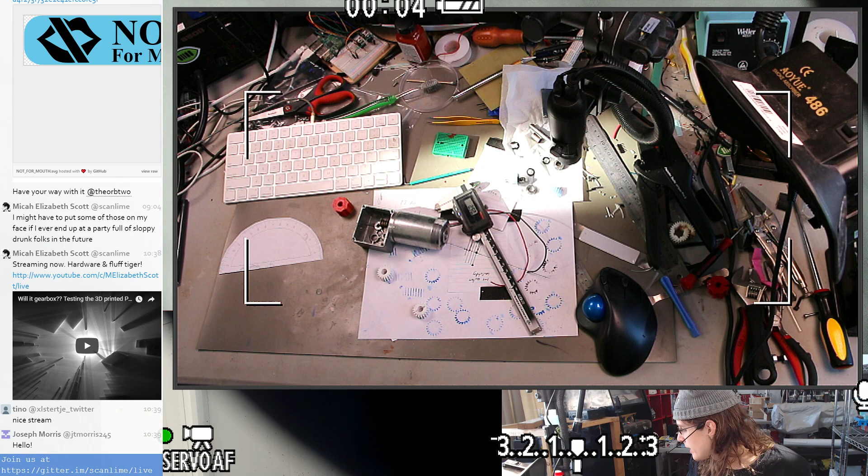And then I think I made the situation a lot worse by opening this motor and then adding some different lubricant that might have been bad for this plastic. And the only reason I did that in the first place is I was trying to diagnose some different problems I was having where the motor worked, but it was a little bit wobbly.

Because this was the motor I was using for some earlier tests on the very first spool design, where I was mounting the spool directly to the motor. It didn't work very well, and it also exacerbated the problem with this motor not being especially straight.

Yeah, it turns out that after taking these motors apart, the bearings on this motor just would not be able to support the spool on its own. It has a bushing on one side and a tiny bearing on the other side. So this motor, I'm not gonna trust the gearbox to support much more than just the output gear.

So speaking of the output gear, we had to destructively disassemble it to take this whole thing apart, which was the plan. This is not the first or the second, or maybe even the third time I've had to take one of these gears off because of all the earlier development and testing. But this is just how this is designed to work. I had tried other strategies.

Some of the other wheels that I use in this design have set screws, but in my experience, I couldn't get a set screw based design to be very strong and very concentric. I also didn't really have room to leave any kind of hole in the gear surface, and I didn't have room to leave a shoulder up here that would support the set screw really. So a lot of factors coming together meant that the best design I could come up with for this gear was something that you hammer on and then cut to take off.

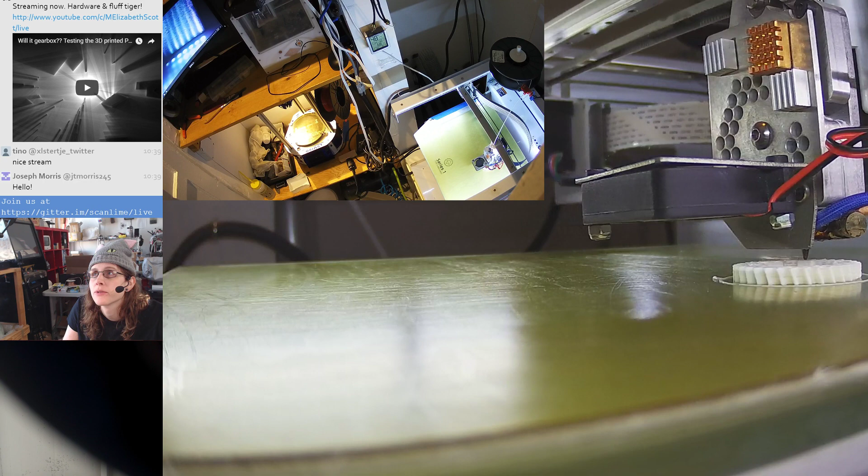So I printed a replacement hub for that, and the flexible part is printing here, and oh man, these cameras apparently are not very reliable right now. I'll have to restart this one. There we go. So yeah, there's the NinjaFlex exterior printing. So that's happening. On the last stream, the plan was to 3D print a replacement for the broken gear. So I'll show you how that goes on in a sec.

I think I actually need to put some gloves on, because, you know what time it is? I think it is Shmoo time. Here's a glove. Oh, there's the others. I didn't even have to get up for that. I'm already getting some of that silicone lube on my fingers just from handling that broken gear.

Oh, interesting. Station 240 is wondering if anybody else is getting a bunch of 500 internal server errors from YouTube. Yeah, I don't know. A lot of the YouTube errors that people seem to periodically have are probably geographical. So maybe people on certain edge servers are having problems and others are not.

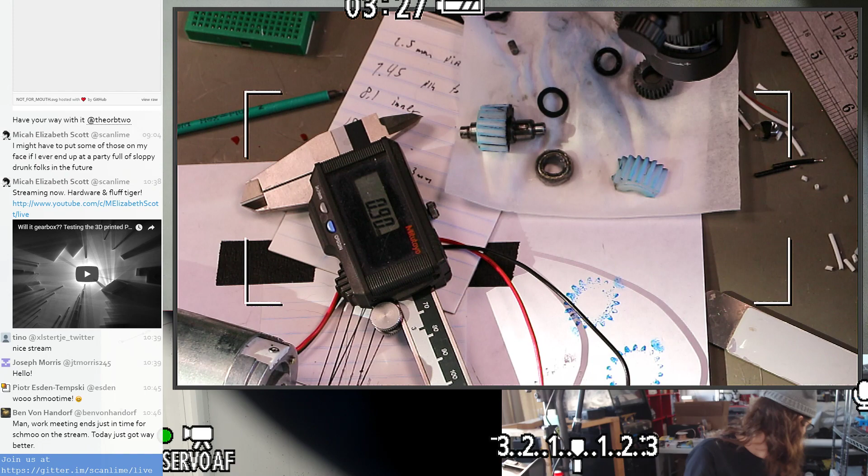I'm actually going to chuck out this broken gear. I don't think we need this anymore, and it's just a lubey, melty mess right now. Just wanted to get maybe another photo of it before I throw it away. So yeah, that's a perfectly good gear that I had to cut to open the broken gearbox. Not a big loss, since it's basically just an hour or two of 3D printing.

Oh, nice. Ben got here out of a work meeting just in time for the Shmoo. Awesome. We also got some random sunlight coming in here. There's not a lot I can do about this particular sunbeam right now, but it'll be gone in probably 10 minutes, so let's just deal with that.

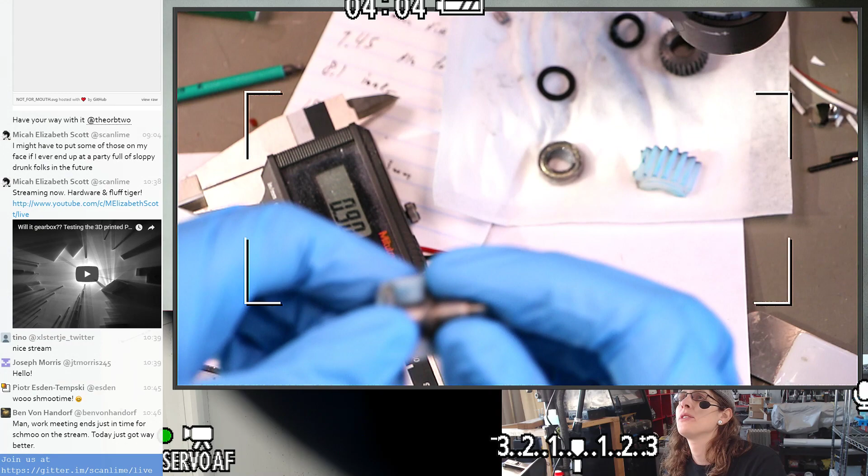Let's actually get a closer view of the original gear. So this is actually new Shmoo. One of the tedious things that we did on the last stream was to fully clean and degrease the old parts, and then reapply grease that is definitely safe for plastics. So I had a mixture of probably lithium grease and some kind of thick oil that it came with. Let's go to manual focus. And so I cleaned all that out and replaced it with silicone Teflon lubricant, which should be fine for the metal pieces and should be great for the plastic.

So yeah, the way this goes together, this is a shaft that was turned on a lathe to get these different indentations and features. There is a hole drilled here and a pin hammered in. The pin looks like it was hammered in with the gear in place. There's a pocket milled where a key fits in there, which is this thing. And that's about it for the axle.

The side with the key holds this other gear, which just holds that nicely against that shoulder. Already some nice Shmoo coming out. And then the original plastic gear fit either like that or like this. Like that. Fits right up against that shoulder. So there's a small gap of maybe 1 millimeter between the two gears, and then a nice surface to fit in. I think both of these sides fit in bushings.

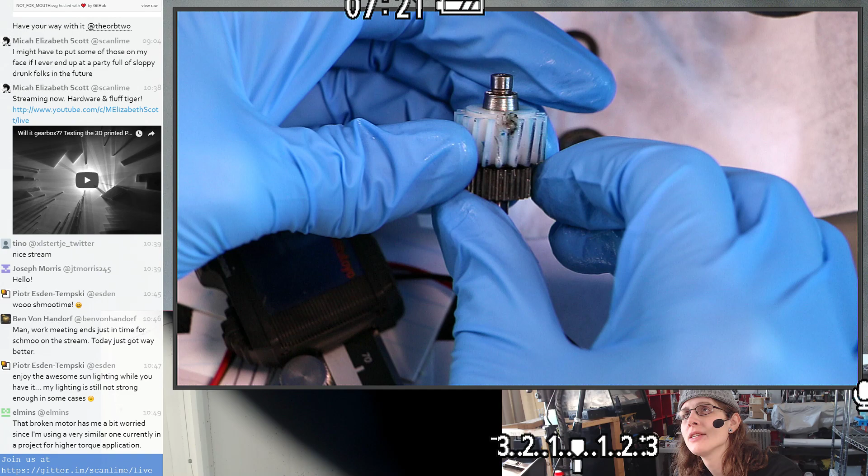So yeah, on the downside, this design seems pretty terrible. On the upside, it might be easy to fix. So my plan: we ditch this gear, keep the whole shaft assembly, and we designed and 3D printed a thing on the last stream that should just slip back over this, and assuming that all fits together, I can use epoxy to form a strong sort of keyway between the pins and the channels that I left in the plastic.

And the one that we printed on the last stream was totally wrong, because I had gotten confused about how this mounted, and I assumed this would fit this way, but of course it doesn't. It fits that way, so the pockets have to be oriented the other direction. And also the inner diameter was just too narrow here. So we already knew on the last stream that this one was no good, so this one's trash also.

Oh well. Oh, and as far as material, most of my printing is PLA, but I wanted to try something high strength for these, so it's printed fairly solid out of PETG. Or no, it's not PETG, it's PET Plus, the MadeSolid stuff. Not quite sure what chemically the plus stands for.

So, if we did this right, and I have not tried this yet, this should fit together like this. And it's a tight fit, which is better than a loose fit. Hopefully it fits at all. I think my printer might have been over extruding a bit for this whole print, which might be bad. Oh, I think it's fitting. It might be time to take this to the vise. It's going to be that hard to get on. I hope it doesn't get stuck on here, because I do need to put epoxy on there.

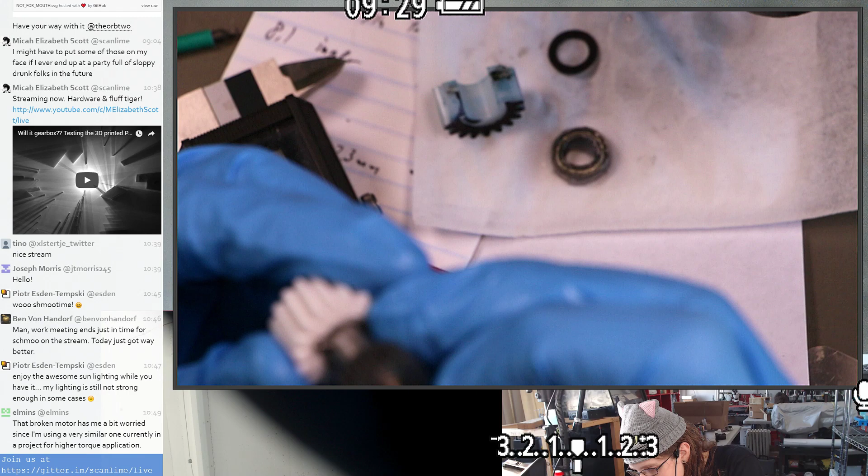Oh gosh. Are these pins not lining up? You know, I just noticed this. The hole the pin is put through is not centered. What? That's off center. I didn't notice that at all. I just assumed it was straight through the center. Well, we might be able to force this together in some capacity. I mean, I left a little bit of clearance, but probably not that much. I'm just gonna see how far I get with the vise. I don't know why that would be off center. That's really strange.

Extrusion multiplier. I don't know. Does Cura even use that terminology? All the slicers have different terminology. I was going to touch the gear. I didn't get that much lube on the gear. I think we're mushing that together. Yeah.

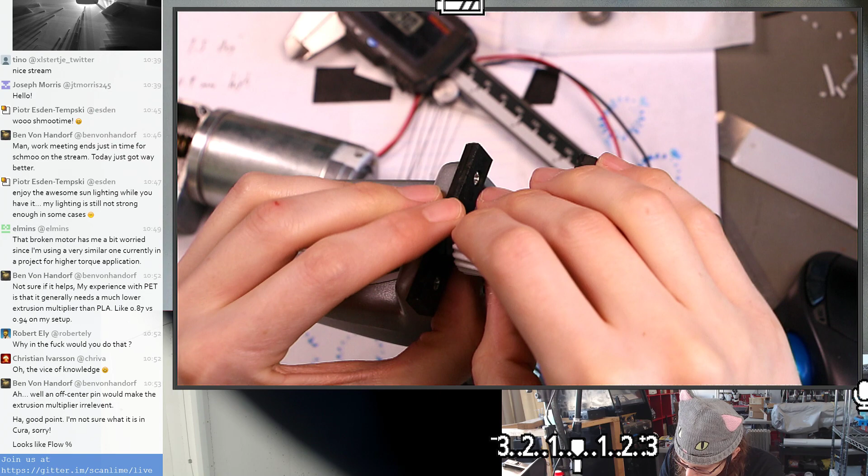Flow percentage. I mean, I thought the whole point of flow percentage was, okay, something is already wrong elsewhere in your calculations, you're just going to bodge it at the very last moment. So we could do it that way, but there's probably another way to do it also.

This is turning out to be a tight fit. We might be able to test this without even putting epoxy in. Ooh, I think I'm getting the nut stuck on there now. Uh-oh. I might need a larger nut. Yeah, I need something larger. Let me look for a different bit of hardware for that. That was an M8 nut. It's a little small for this. I don't have a lot of really large hardware here. Any big washers? Maybe these?

Oh, I think this will work. Yeah. Just keep all them things stacked. Yeah, well, maybe, oh, here we go. Is that better? Yeah. I think we just kind of brute forced our way through the pin misalignment there, but the gear is probably a little bit crooked as a result.

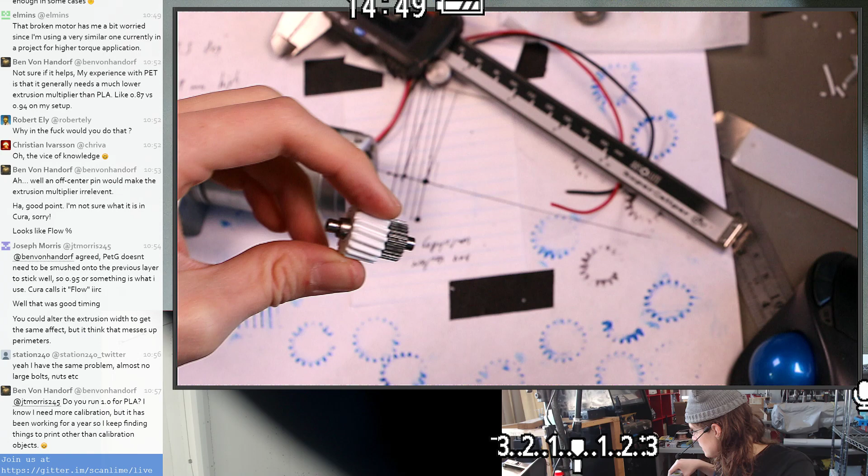Let me see if I can fix the crookedness with the vise. That's not bad. Let's just try that in the gearbox and see if this is even remotely the right size. Because this is all based on some guesses and some bad trigonometry.

Yeah, so actually the problem that was taking so much time last time, I just couldn't find a definitive way to just measure a gear. And so I guess maybe this is just a harder problem than I gave it credit for. There were strategies where if you were designing a gear, you could calculate some measurements, which you could then perform on the gear by putting pins in between the teeth.

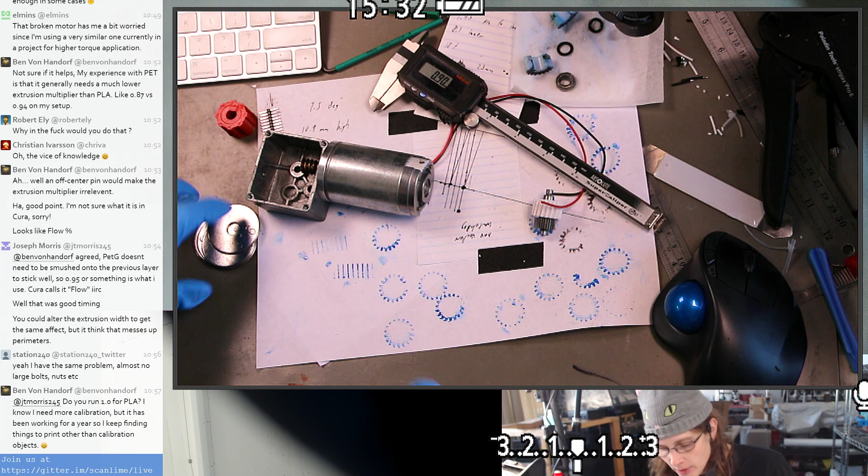But I couldn't find a straightforward way of going backwards from those measurements to possible geometries that the gear might have started out with. And it seemed like that might have actually been a harder problem than I was anticipating too. So we just kind of eyeballed it.

Well, so then I came across the hint that gears a lot of the time use very standard numbers for the module, which is one of the design parameters. And so I looked at some candidates, and this one seemed really close to 1 millimeter, so I just tried using 1 millimeter, and that's what we're doing. There's a little bit of PLA scrap on the edge here. That very first layer did not adhere very well on this print.

Okay. So, let's just see if this works with the worm gear at all. Ooh. That looks really nice, actually. Oh, yeah. Yeah. I say we assemble the gearbox with just minimal extra lubrication and without epoxying the gear in, and then just see how well it runs. And if it runs at all well, then I think we just put some epoxy in and then do some more tests after that cures.

So now I just have to remember how to assemble the gearbox. There's a bearing for the output shaft. There's the output shaft itself, which is a little bit weird. There's a spacer that goes on this side. I'll need to properly lubricate this all when I put it back together again, but yeah, I didn't need to take this clip off at all, really, except to get the old lube off. So that clip can just stay there. It's keeping the gear on, but the gear is also just pressed very tightly, so it's not really going anywhere.

And then there's an O-ring, which kind of cushions between the clip and the sleeve that goes over it. And the sleeve, this is like a spacer. At least I think that's how this whole thing goes. So then that mates with that gear and presses somewhere into the bushing. Yeah, those are mated. Look at all that shmoo. Oh yeah. That is definitely a shmoo o'clock.

Okay, so I'm going to take these gloves off and power up the motor a little. I guess I should put at least a couple of screws in the gearbox. Yeah, let's just put a couple of screws in there, just because I don't want that wandering off and misaligning all the shafts. I know I'm using the wrong kind of screwdriver. Okay. There's shmoo everywhere. Alright. That feels like a worm gear should feel. That's nice.

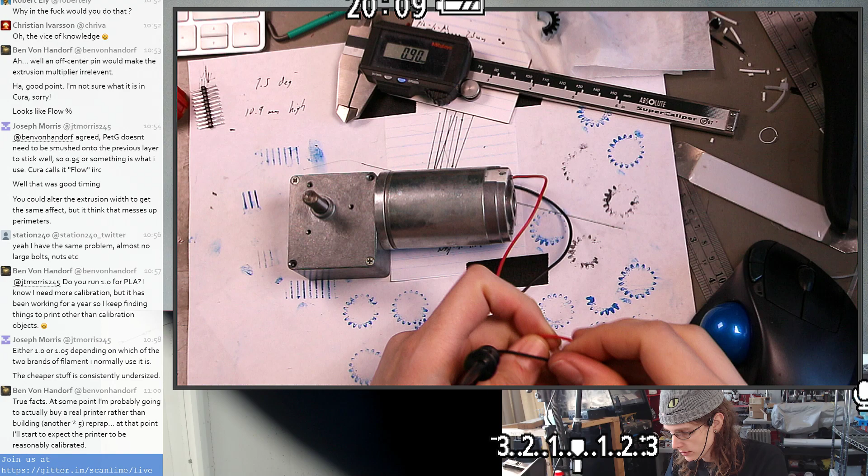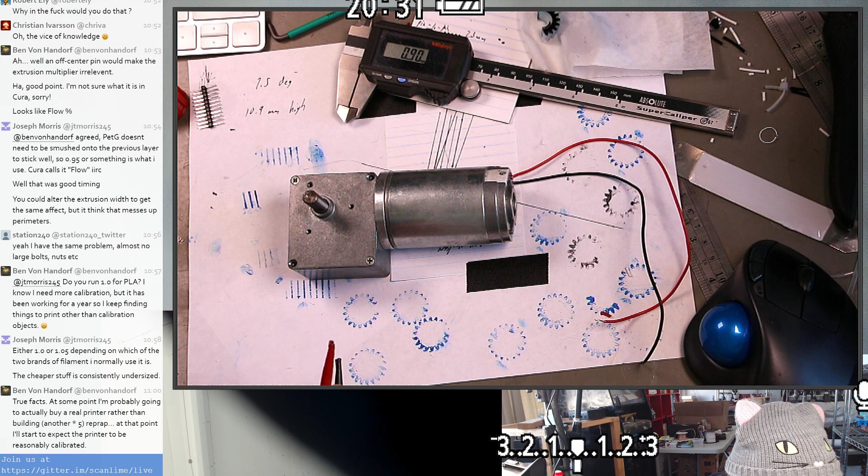Let's get the power supply warmed up. Let's just give it a couple of volts first. That gear was very easy to install, and it might be that the off-centeredness of the shaft is not a big deal, and I can just chalk it up to their sloppy tolerances. I can play that sloppy tolerances game too. Okay, I've just got like 2 volts. I don't even know if the motor will start, but let's try this.

Ooh. It was turning. Oh, I hit current limit. I only had the current limit set to 0.5 amp. Let's bump that up to like an amp or so, 1.5 amps. Okay, it needs a little more voltage.

I think it's actually stalled. I'm gonna give it a little more current, but I think it's stalled. Yeah, that... Oh, no, there it goes. Okay. Hear that? Let's run it at higher speed for a little while and then open it up and see how it looks inside. It also does not have very much lube, so I'm not going to run it much. And it's only got 4 volts, and this is a 24 volt motor.

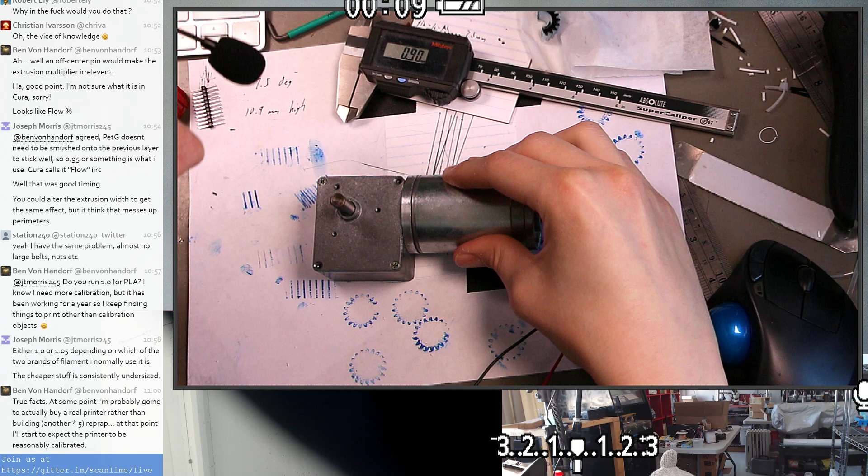Oh, it is knocking. Yeah. Let's see how it looks inside. That would be usable, maybe. We got up to like 20 volts there.

Sorry, I'm a little behind on the chat, everybody. Use the other 3D printed gear. Which one was that? Oh, you mean of the 2 I printed? Yeah, I was making sure I had the 2 straight.

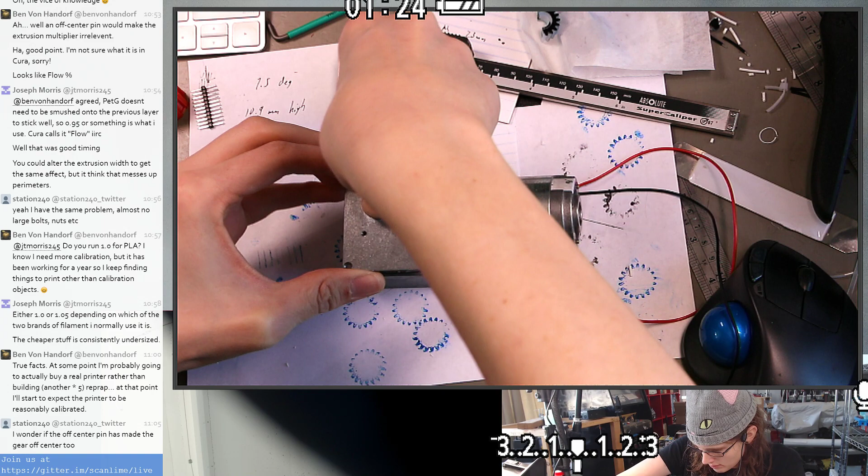Releasing the shmoo again. Is this a re-release of the shmoo rerun? Whoa.

What is going on in there? I mean, there's lube everywhere, which is good. I don't actually know where that really horrible feel was coming from. It could have just been unevenness on some of these teeth that would maybe wear away over time. I don't see anything terrible, though. So... yeah, you know, I might just put some epoxy and some lube in this and then let's close it up and run it for a bit.

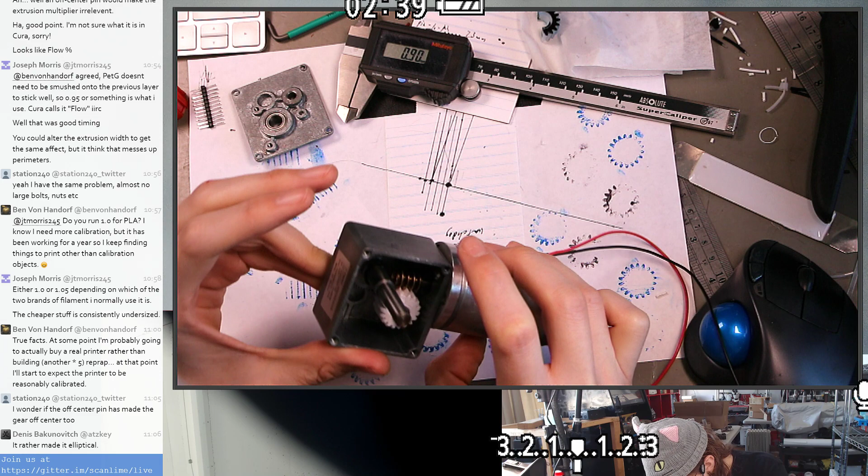I mean, I shouldn't do too much with it until the epoxy cures, but it honestly doesn't seem like I need the epoxy for that much right now, so maybe it's not a big deal. It'd be nice to look at it here, but we can't really run the motor without the top case on. I mean, I could try running it really slowly, but there's a chance it destroys something by being misaligned. Let's just give it a couple of volts. Back to 2 volts at half an amp.

I'm gonna get a better camera angle too, or a better zoom. Oh yeah, that's a good point. station240 says that the off-center pin might have made the gear elliptical and kind of off-center. Yeah, maybe I should reprint this instead of just gluing this one on. I'm schmooing everywhere. It just got pretty jammed. Oh. Yeah, well, that's a good point. I'm gonna put some gloves back on and take this off, and let's look at how circular our gear is at this point.

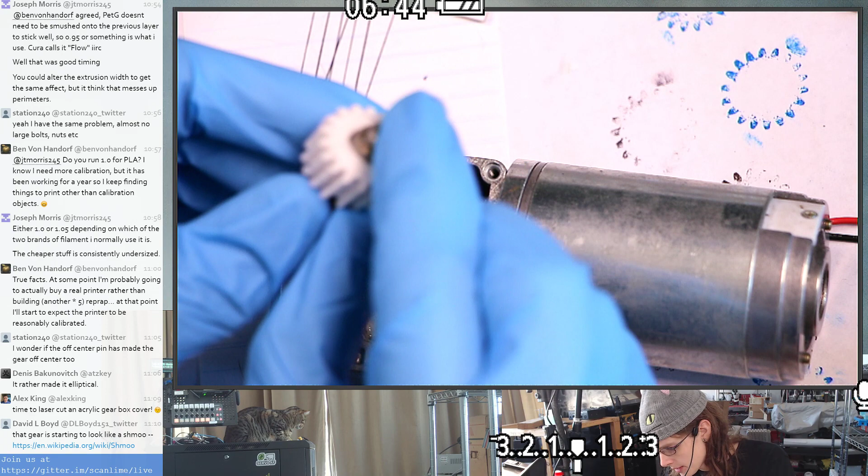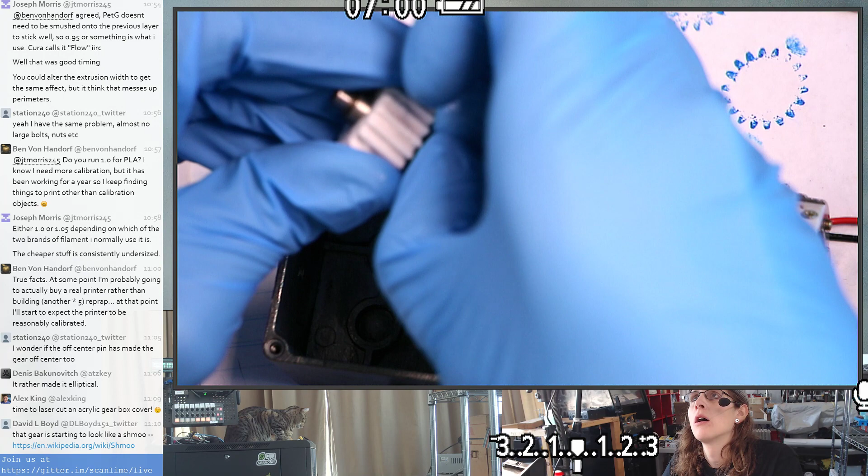So for this, I suspect I'll have to press it out with the vise or cut it off again. Pressing it out with the vise might be easier. Let's find out. This gear just slides off, and let's save the key. And save, not drop. Save, not repeatedly drop. Alright. Well, hammer maybe. I could probably put this on top of my vise and then just hit it with a mallet a few times and get it out. Mallet.

So there's definitely a bulge on this left side of the gear. Like, yeah, it's kind of cinched together the material on that side of the gear, stretching it. It's very strong though. I'm pretty impressed the plastic didn't break during that process.

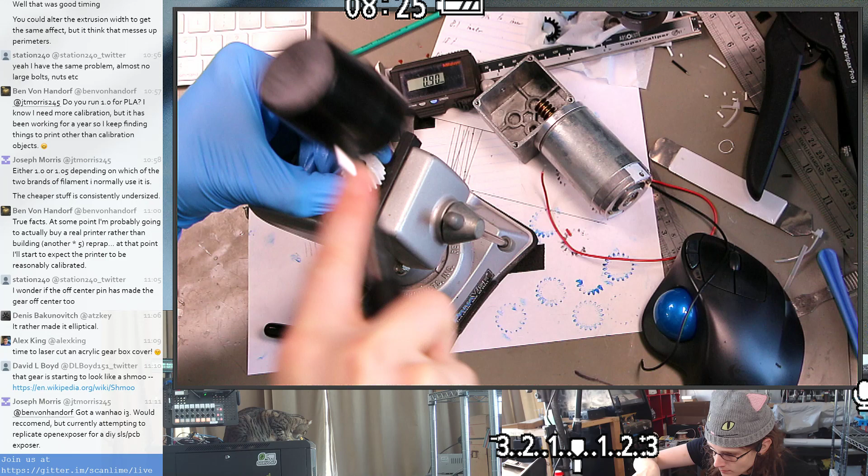Yeah, something I can poke this out with. Oh, this is about the right diameter. Oh, not enough oomph there. There we go. Alright, there's the shaft. Good as new.

And, oh, there's our slightly distorted gear. Okay. How far off was that? We're obviously headed back into CAD, but geez. It looks like it's just entirely to one side of the center line. So if that's the center line in the middle, I think we've got the whole thing down to the bottom.

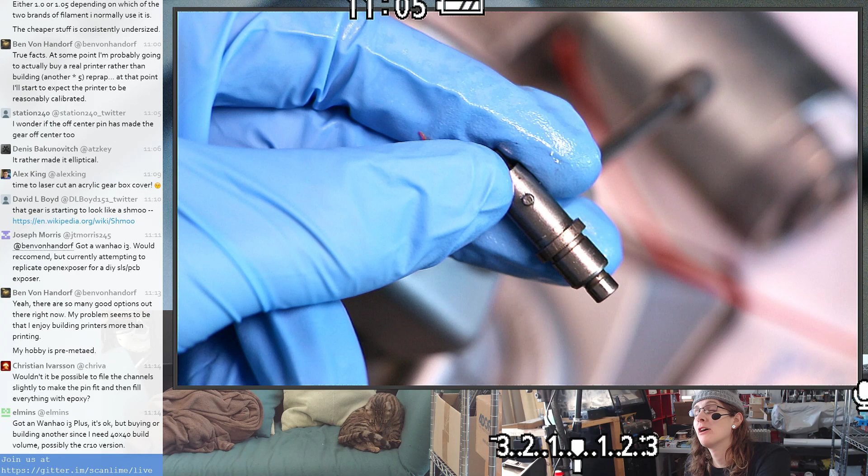So we can also make the channel a little bit wider. I probably will go ahead and put some epoxy in because, well, I guess it's probably worth another test fit. But the thing is, if I have to destructively-ish get the gear off, then I might just go ahead and put epoxy in the first time I put the gear on. And then if it works, I'm done. And if it doesn't work, I just have to also take off the epoxy when I'm taking the gear off. I think that might be where we're at. But if we're going that route anyway, then I can make the channels a bit wider pretty easily. Alright, back to CAD.

Oh yeah, how's the printer doing? Wake up. Still making that gear. Alright. Well, depending on how this goes, this might end up being kind of a short stream where I design a part and then I'll have to get back to you once I've got the next version printed.

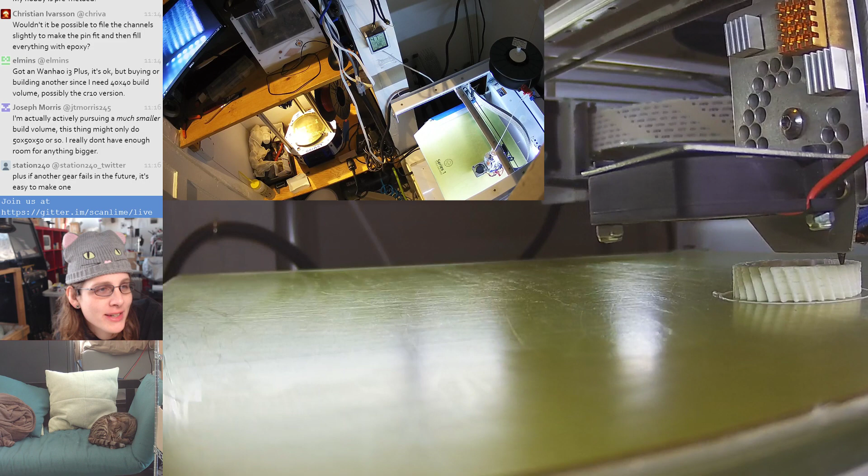Oh, nice. Tim in Twitch chat says that they've been keeping up with the streams after the fact, and it's been great to see the spools running completely for a bit. Yeah, that's been great. Oh no. And then Tim has also been having problems with YouTube where the chat was disconnecting and then they couldn't add videos to playlists. That's weird. Anybody else having that problem?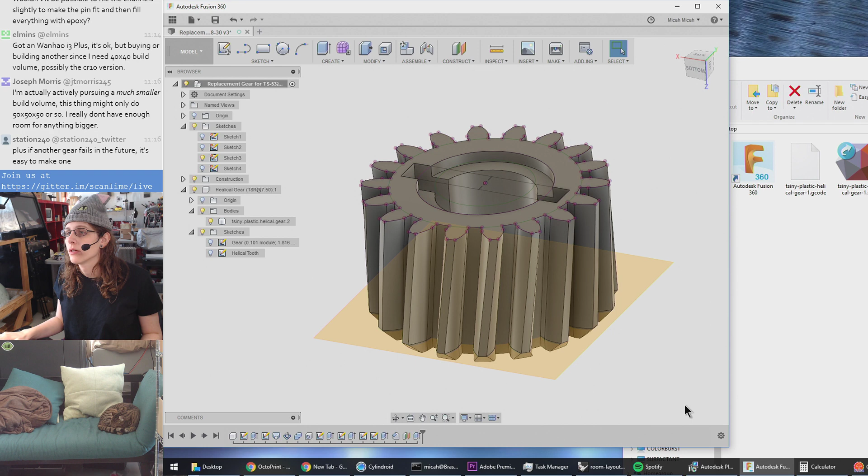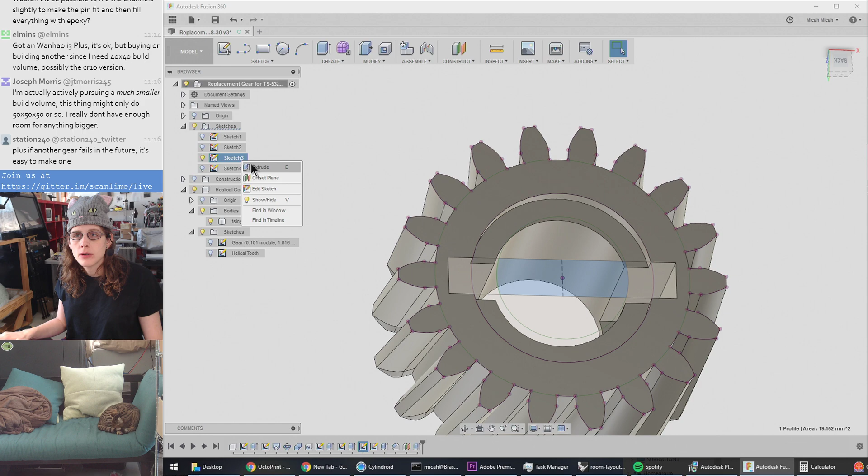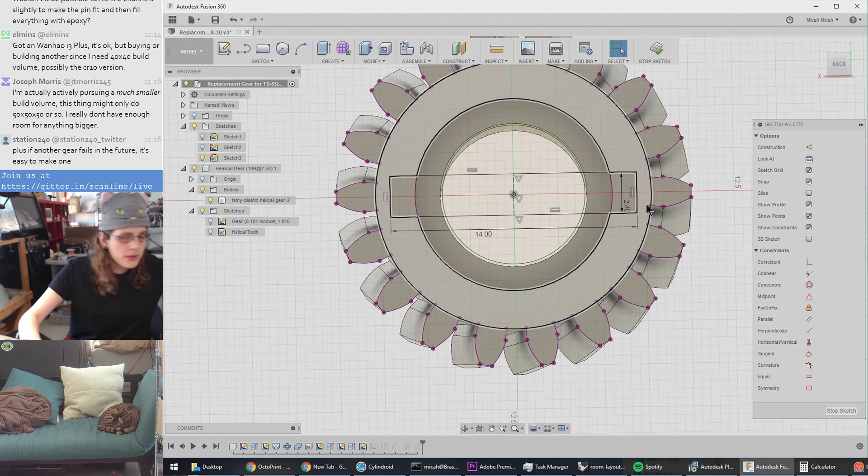Cat. I don't think we need quite that much of a view. There we go. Alright, here's our gear thing. Yeah. So, I'm liking this design for the most part, but we need to change this sketch. Edit. So the pins were like exactly 2 millimeters in diameter. That additional is just our allowance for 3D printer tolerances and wiggle room. So I want to get rid of that.

Let's make this a whole 3 millimeters. And actually, how do I want to do this? I could make something and dimension it as 2 millimeters to kind of stand in for where I think the pin is. And then just make this centered around that.

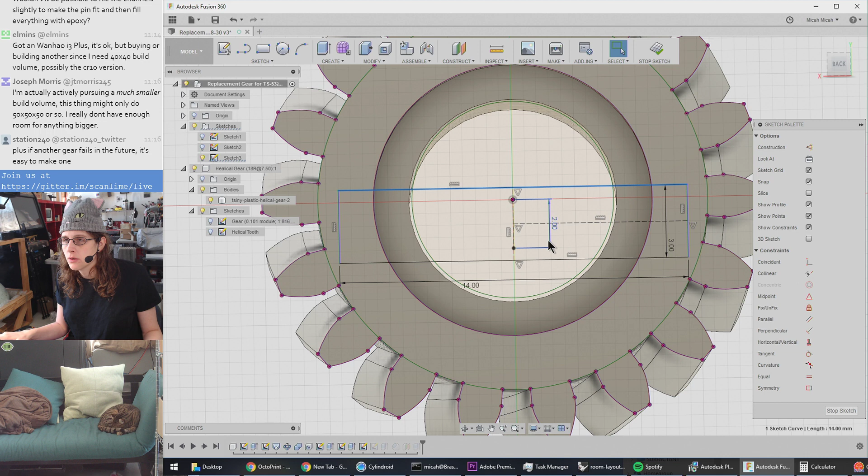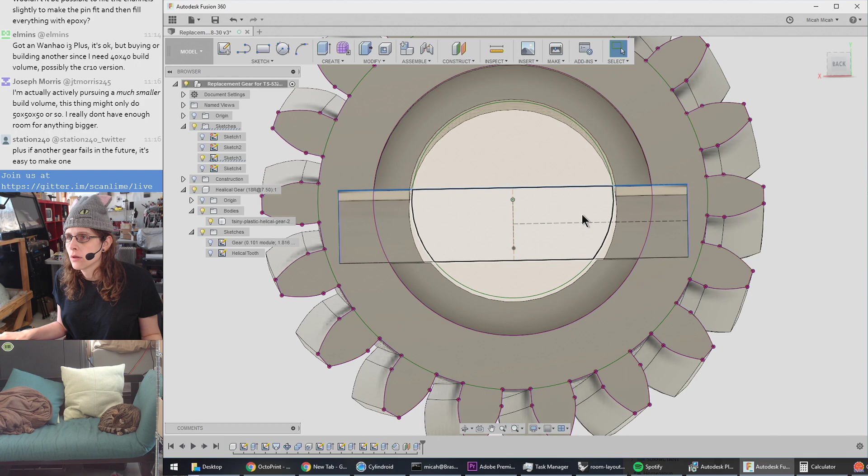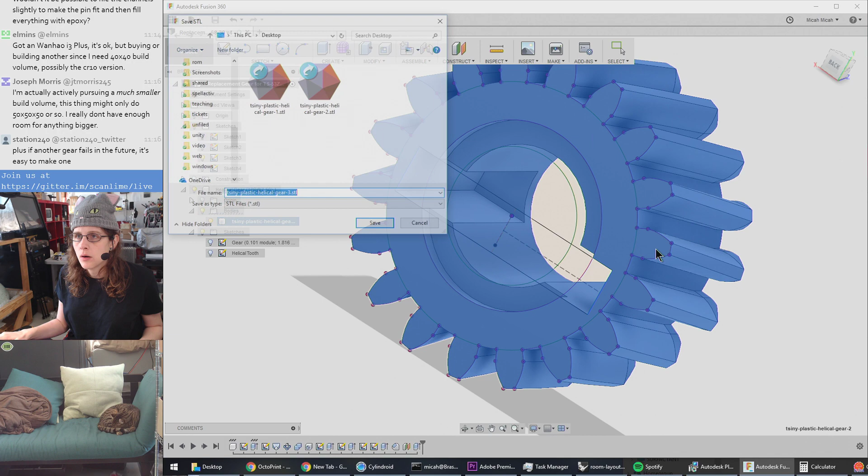Okay, cool. So now we've got this pocket that extends what should be like a 1/4 millimeter above and below, or 1/2 millimeter. It's a little close at these corners, but I think we'll be all right. It's a very minor change. And did our extrusion update? That looks right. Alright, I think that's all we needed. Let's bump the revision number and get this slicing. Same parameters as before, I think. That was working pretty well.

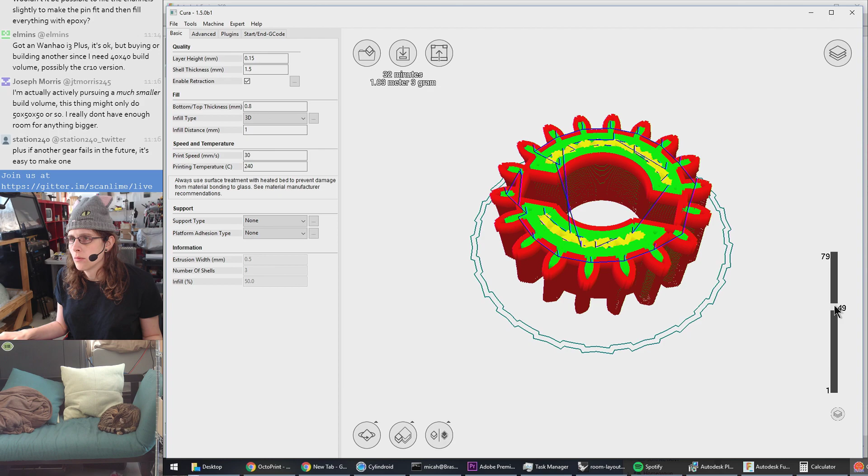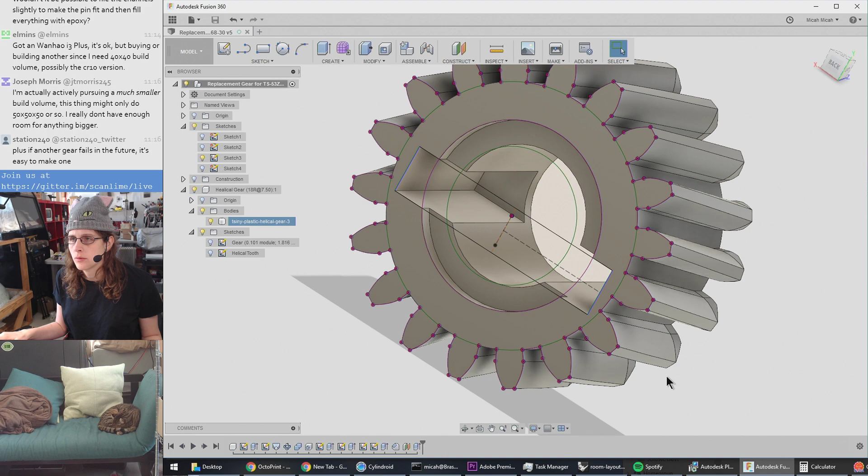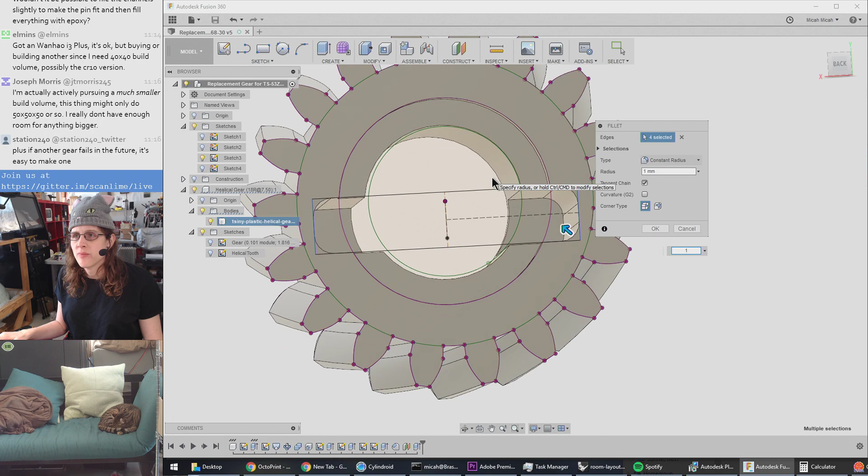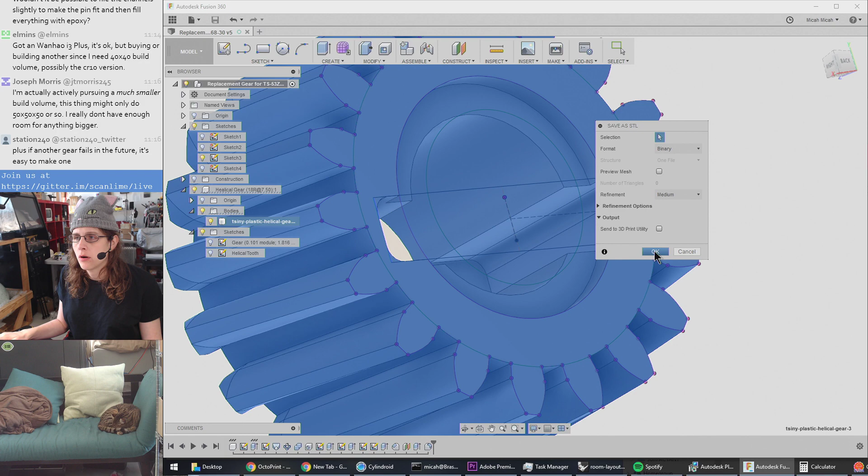Oh, yeah, that's actually a little too thin there. All right, we can't go quite there. I need to round off those corners. I think I've got enough clearance to do that. That's a whole millimeter. I think that should be plenty. That's maybe even too much. 3/4. I'm going to save that with the same revision, because I didn't even print it yet. Reload.

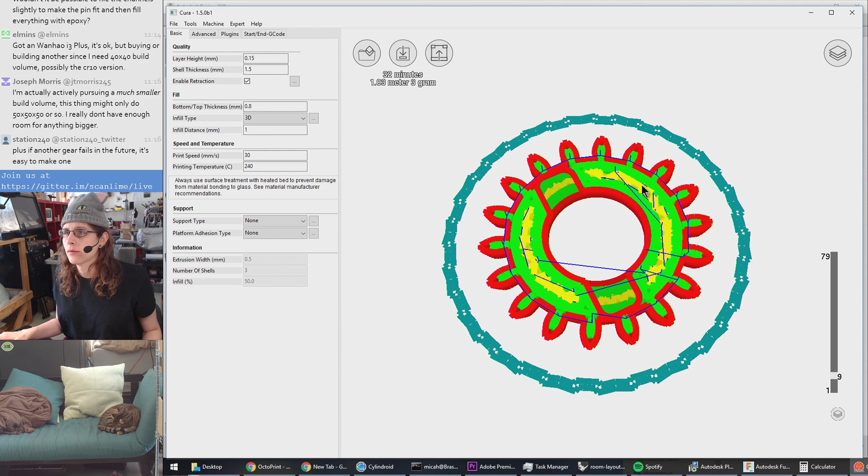Yeah, Station 240 says, plus if another gear fails in the future, it's easy to make one. Yeah, these are actually easier to make and install and all that than they could be for sure. It seems like it might be relatively easy to replace in the future. That's better. That's obviously a weak point, right? But I'm going to fill that whole area with epoxy.

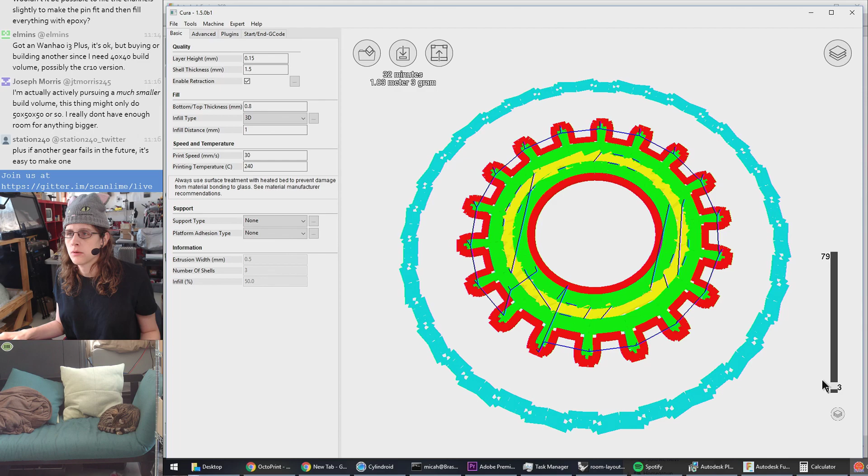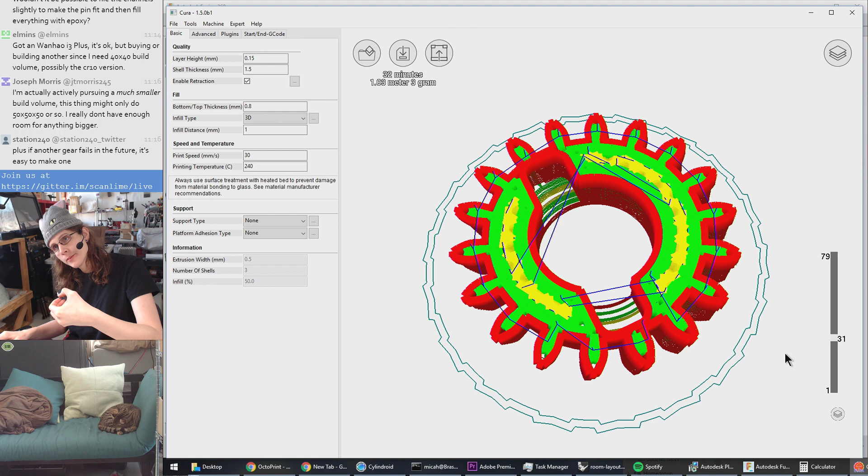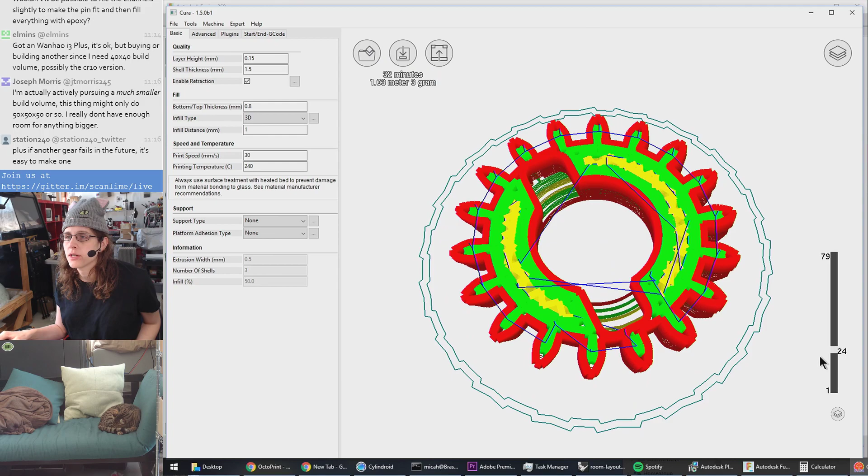And it's so off-center. Okay, is it off-center on the right side, first of all? I should actually be asking these questions. I think so. I mean, yeah, no, it doesn't matter. It's symmetric along that axis. So all that matters here is the handedness of the helix, and that's correct. So I can just rotate the shaft 180 degrees and it doesn't matter. There's nothing else that needs to be timed on that shaft. Alright, let's get that ready to print.

Alright, well the printer is still printing this gear. I think this G-code file actually has multiple gears in it, and I only need the first one, so I might stop it after it gets past that.

I don't know why these cameras keep going blank. This might be a new OBS feature. Oh, interesting. Electron Ash adds that YouTube was having some known issues last night, I guess.

Well, I think we might be at another point where I have to switch gears a little bit because we're waiting on this to print. And I could just launch into something completely different right now, but this might be a good reason to do that on a slightly different stream.

Well, congratulations that 69 of you are watching on YouTube as we 3D print a helical gear. I mean, we're also watching the cat sleep, which is pretty great. I mean, we could also watch the robot fly around. Wow, is this camera also going to need to be reset? This has got to be something new in OBS. Anyway.

So we can drive that around with three winches. Since three winches doesn't have any redundancy, I didn't want anything especially heavy up there, so I'm driving a slightly lighter spool of wire. The one I was using to stand in for the robot is about the same weight as the robot, at about 1.5 kilograms, but this one's only like half a kilogram.

So here I'm just driving one winch at a time. And it's nice. It's stuck in the triangular prison.

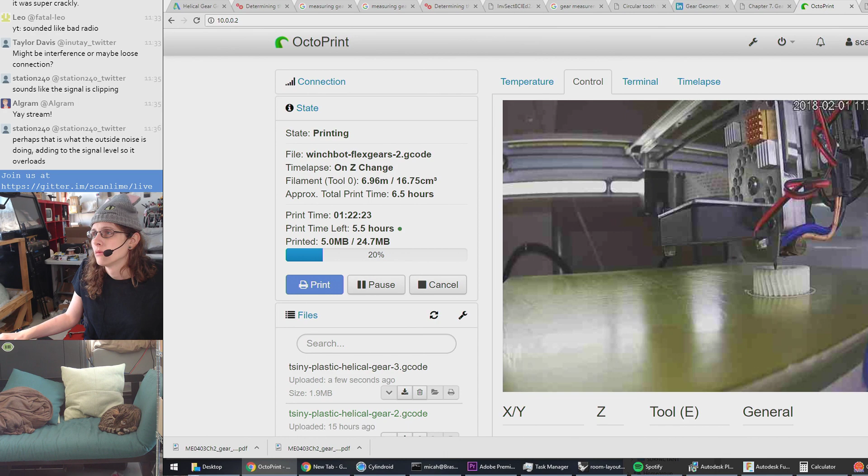Taylor says maybe interference or loose connection. I mean, yeah. When I was just listening to it, it sounded like analog radio interference. Mr. Radar says it was sounding like a buffer overrun or underrun. Really? I can't fathom how that would be happening right now, but okay. Sounds like clipping. Huh. Okay, well, I'm almost done with this stream anyway. I'll try to debug it later. Paul is asking about what version of... I'm gonna ignore that question because I don't know what you're talking about, sorry. It didn't seem like it was clipping on my end, but you're listening to a slightly different signal than I am, so I'll have to check the recording later. There isn't much I can do about that right now.